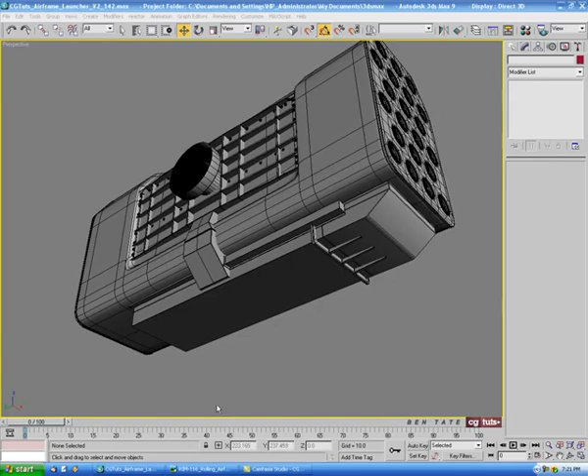Okay, let's do some of this bottom detail here. I think we actually want to have the bottom of this extruded out a little bit farther here. You can see that the bracket piece we just made is actually sitting against a little bit of a lip here, and then the doors are on the bottom of that.

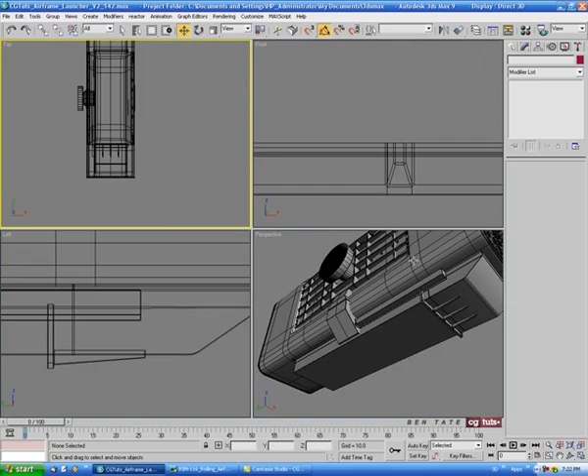We could just pull this polygon out to get a little bit of a recess there, but because we've already chamfered down the edges on the main piece of the base, that's going to give us a little bit of a problem. So just for the sake of speed, I think I'll just put another small box on the bottom of this. Let's select this piece and this piece, and then we'll hide unselected.

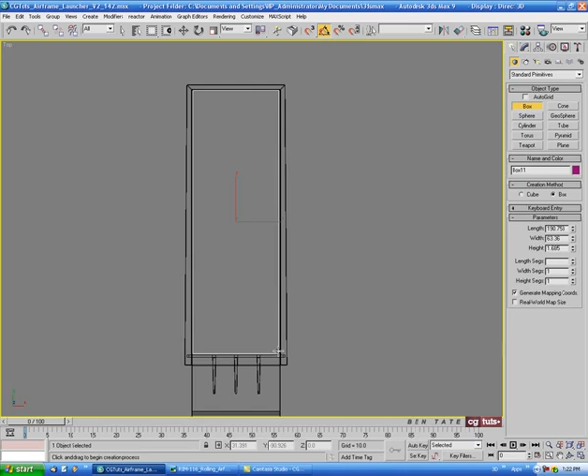Then we'll go into the top view, go back into the create panel, and grab another box. We'll do this a slight bit smaller than the bottom, give it a little bit of height, and center it on X and Y, then move it down in the front view and set it on the bottom here.

Just like that. We'll also move it down in the left view to the back, lining it up just behind the band that we made. Let's figure out the width of this.

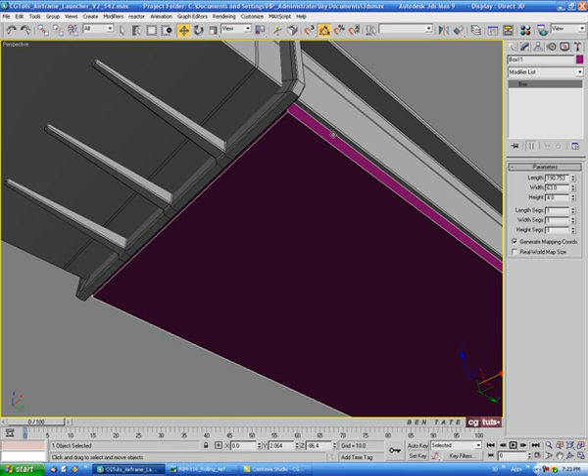Let's do 190.7 on the length, 63 on the width, and maybe 4 on the height. We'll leave it a little bit in from the sides so that we have another reveal there, just to make it look a little bit more detailed. So let's right click and convert this to editable poly.

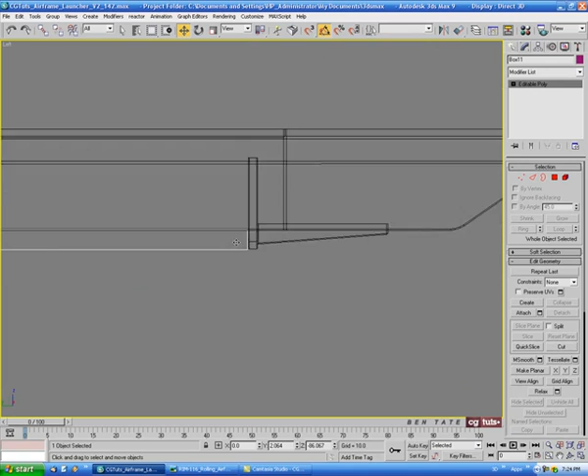Let's move this up a little bit just to make sure it's touching the bottom. I think that should be fine. We really don't need to add any detail to this piece, we'll just round the corners off a little bit.

So let's convert to editable poly. We're going to edge. Let's actually delete the top polygon here first, select the top polygon and delete that. Then we'll go into edge and hit Control A. Let's deselect the top ones - there's really no reason to chamfer those.

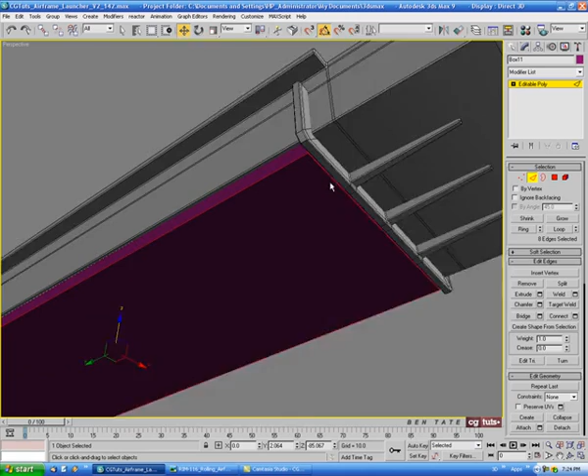So let's just select the edges in the left view, the bottom and the sides, and leave the top unselected. Then we'll just chamfer these ones down just a little bit, maybe 0.25.

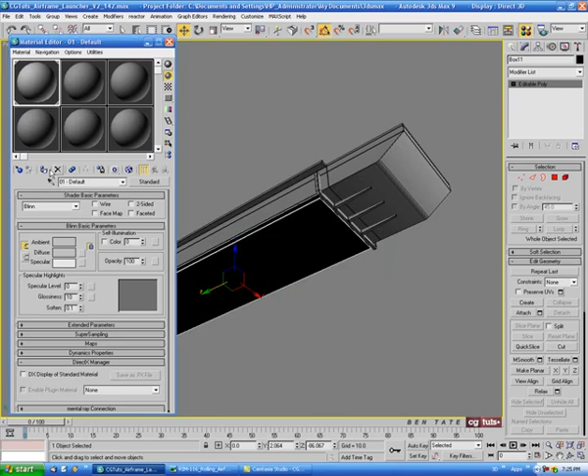Let's just throw the black color on there and see how this looks. That'll give us a little bit of an extra edge on the sides, which will make it look a little bit more detailed. I think that's good.

Now we can just put these doors on. They're pretty simple too, pretty much just boxes. I'm not going to cut the holes in over here, just for the sake of time. I'm going to leave those off, as well as the one around the piece that goes into this side piece. So let's start working on the doors.

For the doors, we could do this out of boxes, but you can see that we have a couple of holes cut into them for handle holds, and there's also a cutout around this piece sticking out here and here. So I think the best way for us to do that will probably be splines, because it's going to be a little bit faster than trying to cut the holes in with edit poly.

So let's select the main base piece here and hide that. Now we've got this piece left. We'll go into the top view. You can see we have a kind of a small door here, a larger one here, and another one at the back. Let's zoom in on this in the top view, I'm just going to zoom into the end here.

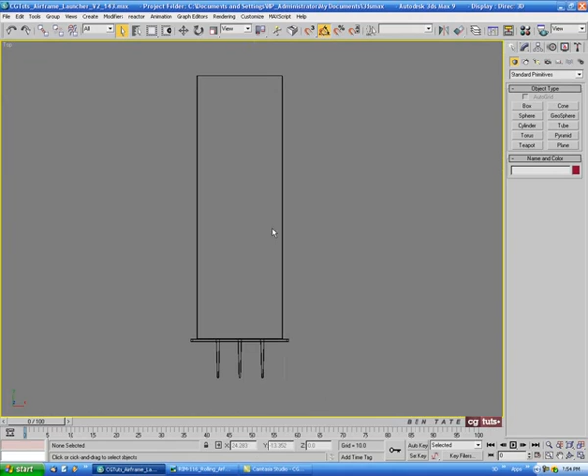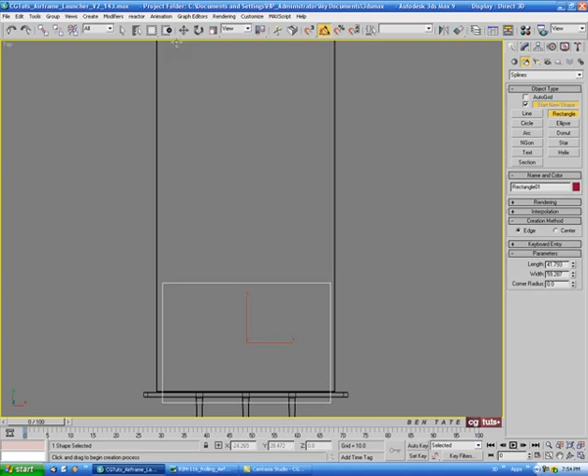We'll go into shapes and grab a rectangle. I'm going to make this a little bit narrower than our box here on the bottom. We'll just drag this out for a second and figure out the size. We'll also go up to the move tool and zero out the X spinner, so it's centered.

Let's do maybe 45 on the length, and maybe 61 on the width. So just like that, we'll just put it right there.

Okay, and for the handhold, let's do another rectangle. We'll just drag that out. You can see it's at the back side here, this cut in and the handhold. So we'll just drag another rectangle out in the center here.

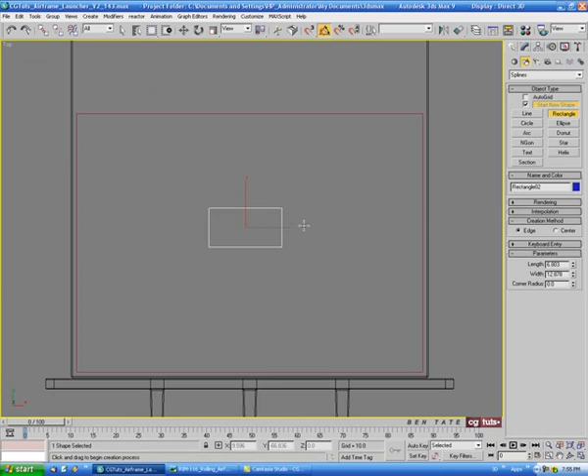And we'll also center that on X. And for the size of this one, let's do maybe 6. And for the width, let's do maybe 13. Okay, and just let me change the color of these.

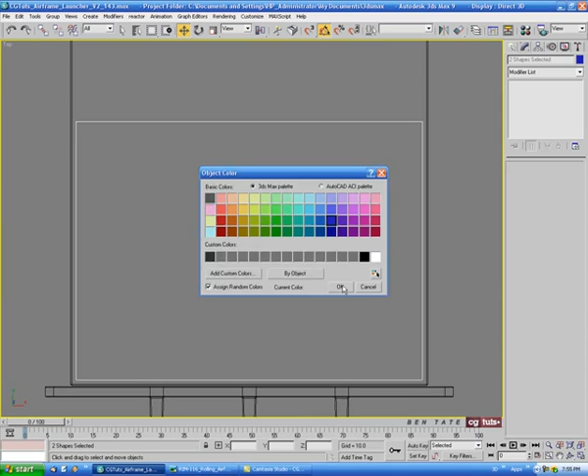Okay, so just like that. And let's select the outer rectangle here. We'll convert it to editable spline. Okay, and let's go into vertex. We'll select all the corner verts, all 4 of them.

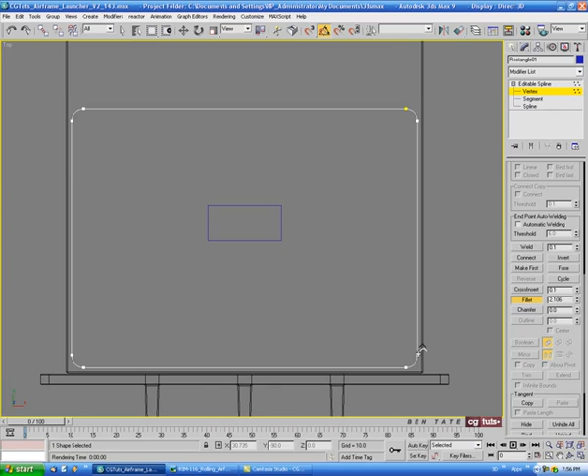Let's scroll down here to fillet, and we'll just give these a bit of a round over. I'm just going to hold the button down and drag up. Let's do maybe about a 2.1 or so on the fillet.

We'll go to vertex, and let's select the middle one here. And let's also convert that to an editable spline. We'll do the same thing here, go into vertex, select the vertices, and we'll fillet these over. We want this to be a little bit more round, let's do about 2.5 for the fillet on that one.

And okay, we'll go to vertex. Alright, and you can see that the hole at the back here is pretty much just half of the shape of that. So let's just hold down shift, we'll drag and copy this up to the edge. Choose copy and okay. Let's just zoom in here.

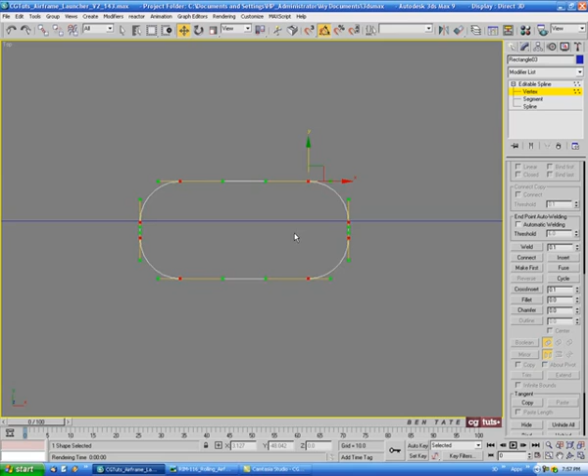I'm just going to go into vertex. Let's select all the verts on this piece. We'll just move this up a bit, so this vertex here is lined up with the edge pretty much. Just like that. Okay, then we'll turn that off. See if this looks about right.

I think we might be able to scale the handhold down just a little bit. So I'm just going to scale it down slightly.

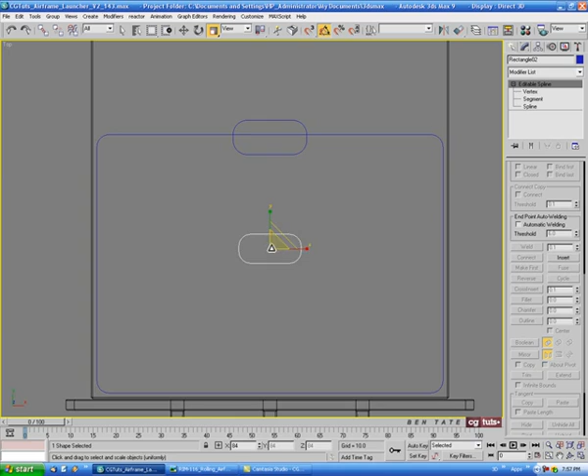And then we'll go back up here. Let's select the circle piece here. We'll go into segment, and let's select the top 3 segments, and we'll just delete those. Okay, get out of segment.

Then we'll select the outside rectangle here, and we'll go into vertex, and we'll go down to refine. We'll just add a vert right here at the edge, and one over here. Just like that. We can turn off refine, and we'll go into segment.

Whoops, just select that middle segment there. We can just delete that, okay, just to cut that out. Okay, so let's turn off segment.

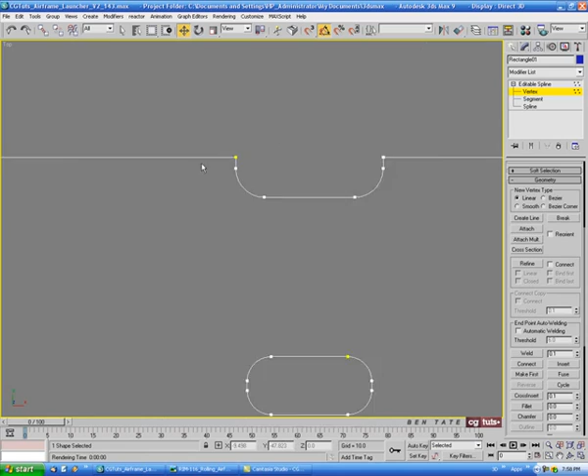We'll go down to attach, and we'll just attach all 3 of these together. Okay, then we'll go back into vertex, and we'll just weld these 2 corners here. So we'll select the 2 verts here. We'll go down to weld and just up this a bit, and it will hit weld, and we'll do the same for these 2 here, and weld, and okay.

Alright, so I think that's good for the first door, and we'll move on to the second one here. Okay, and it looks like we have the cutout on this piece as well, and probably also at that end.

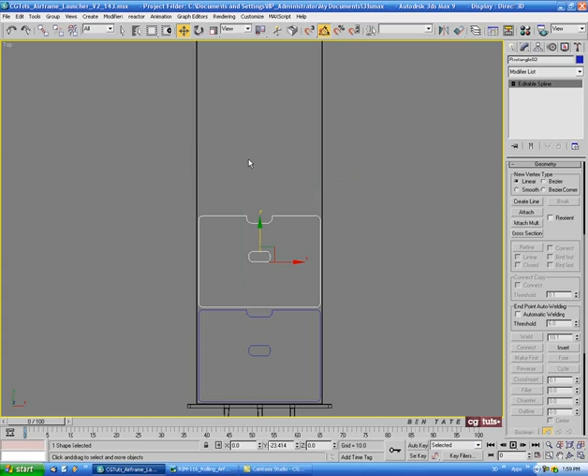So let's drag a copy on the X or the Y up, holding shift. We'll just choose copy and okay. Let's go up to rotate and make sure you have your angle snaps on. Just rotate this 90 degrees, okay, just like that.

Okay, and we'll just push this down, leave a little bit of a gap between the two. Okay, something like that.

And let's also do another shift drag. Okay, up like that. We'll do another copy and okay. Let's just rotate this around again, 180 degrees. Okay.

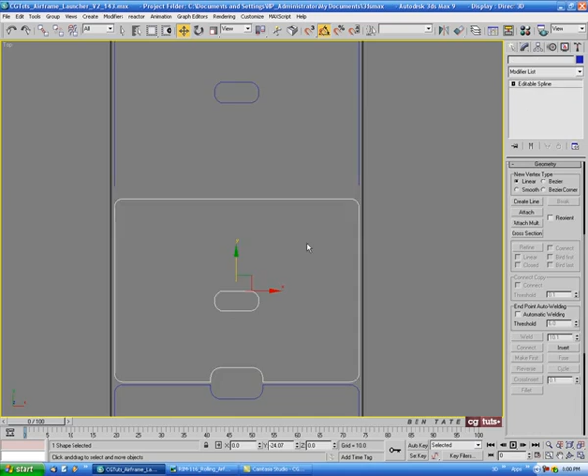And let's see, let's go into segment on this one. Okay, we'll just select the bottom 3 segments here and delete those. And we'll select the second door here, and we'll do the same thing on this one. Delete the top 3 segments and okay.

And then we'll just move this one down so that the edges line up. Okay, like that.

And now we'll attach them together, so we'll go to attach and just click on this one. Turn that off, then we'll just go to vertex and just weld these 2 verts here and the 2 on this side. Okay, so it's all one piece.

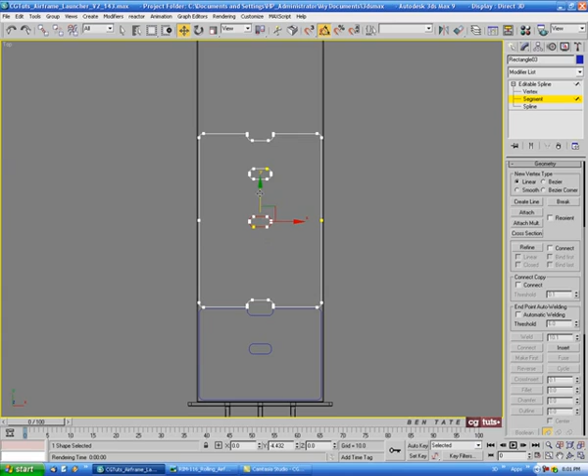Okay, and you can see on here that the holes are a little bit farther down to the end. Alright, so let's just move this guy down a bit. So let's go to segment. Let's grab all the segments on this hole and let's just slide it up a bit. Okay, we'll just bring it up about halfway maybe, like that. And okay.

And for the end one, let's drag another copy of this one down. Okay, choose copy and okay. And we'll just leave a little bit of gap between these two as well. Okay, let's go into segment again. Let's select the center segments around the 2 holes and we'll just delete those.

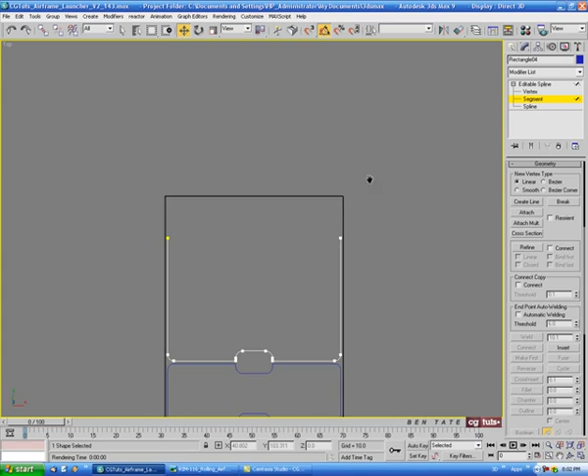You can see here that there really isn't any on this piece. Okay, so delete those. Let's also grab these segments here, everything from the halfway point up, and we'll delete those. Then we'll turn off segment and we'll go into shapes again. Let's grab a line. And I'm just going to put my snaps on for a minute and just make sure you have vertex checked when you right click on that. Okay, and then we're just going to drag a line from this vert to this one and then right click the end. Okay.

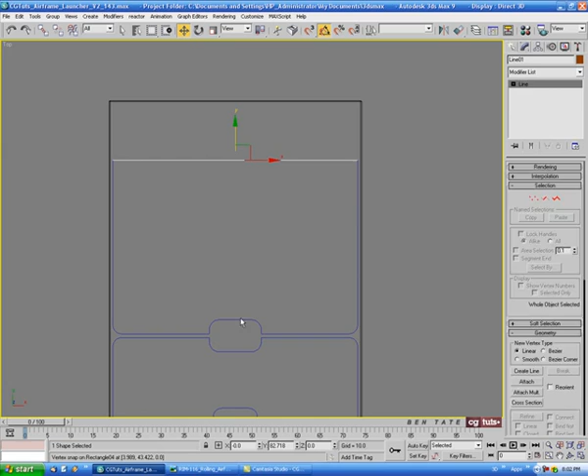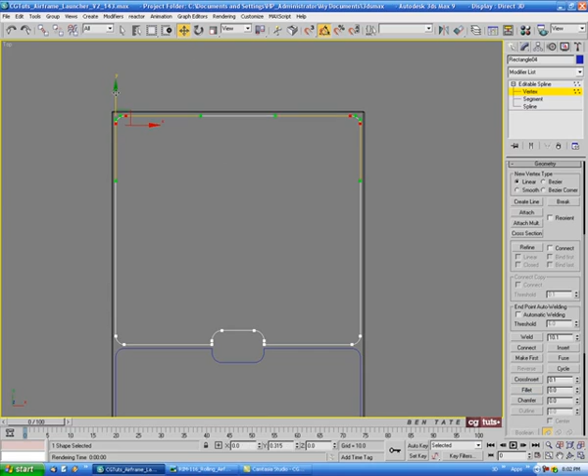Let's turn off snaps first. We'll select our door here and then we'll just attach it to the new line. Okay, and then we'll go back into vertex and weld the corners. Okay, and then we'll just select these guys and we'll just push them up to the end. And then we'll go to fillet and we'll just round the corners over again. Okay, just like that. We could probably do these a little bit closer to the end. Okay, so just like that.

Okay, so let's just drag through and select all 3 of the doors. Okay, and in left view, let's just pull these down to the bottom here. Alright, and we'll just select the first one here, and let's put a shell on this. Okay, so down to shell. Okay, and we don't need this to be really thick. Let's do maybe 2 on the outer amount. Let's do 1.5 maybe. Okay, and let's just copy the modifier here.

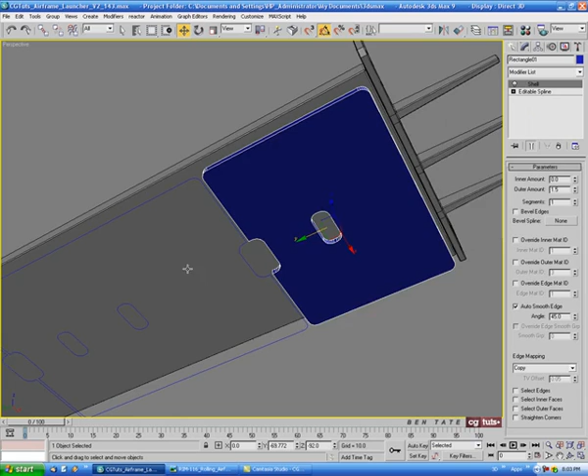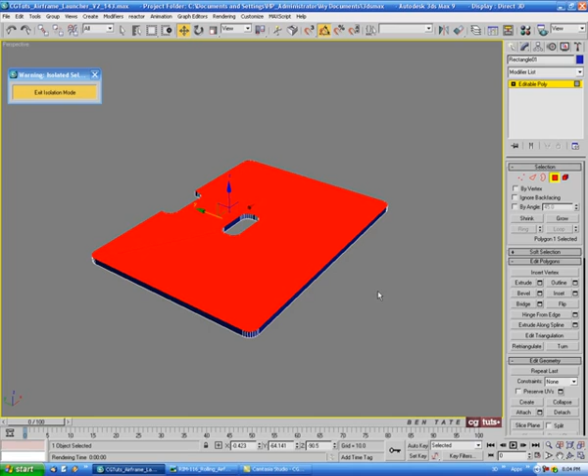Okay, and I'm just going to select the next door down, and we'll just right click and paste that in there, and we'll do the same for the third one. Okay, just to shell all 3 of them. Right, and then we'll come up to the first one again. Let's right click and convert this to editable poly. Okay, and let's go into isolation mode with Alt Q. Okay, then we'll go into polygon, go around to the other side here, select the top poly, and just delete that because we'll never see that one.

Okay, and then we'll go into edge, and let's just go into the front view here. We'll select all the edges. Okay, then we'll hold Alt and just deselect the top and sides. Okay, so the only thing we have selected is the bottom border. Okay, and we'll also deselect this edge here. Alright, and make sure you have ignore back facing turned off. Okay, so we'll just give this a little bit of a chamfer. Let's take this down. Okay, we'll take that down. Let's do maybe 0.3 and okay. Okay, just to round it off a little bit.

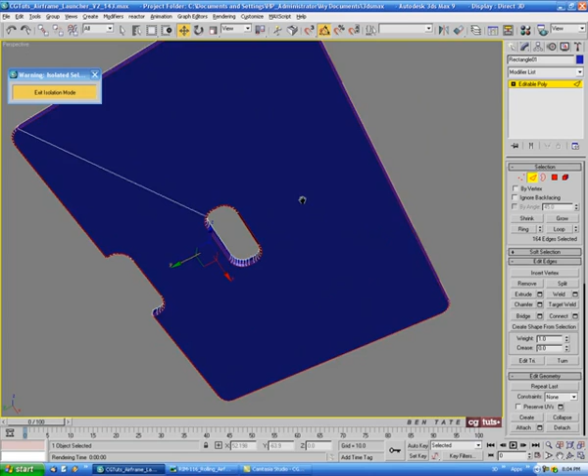Okay, we'll just check to see if that renders properly. Okay, occasionally we'll get an artifact around the edge, but that looks pretty good. Okay, so let's turn that off and we'll exit isolation mode. And we'll repeat the process on the other 2 doors here. Okay, so let's convert this one to editable poly. Go into isolation mode. Delete the top polygon.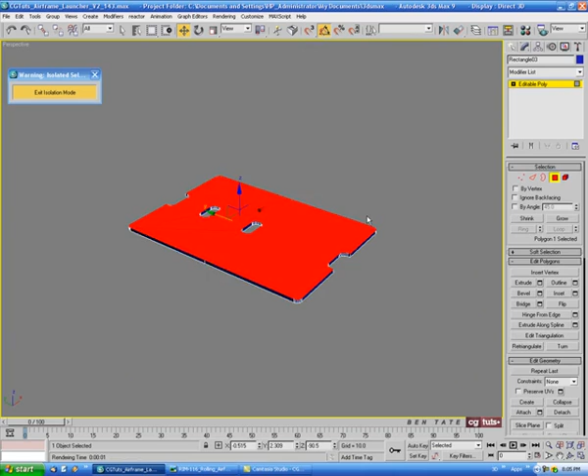Go into edge. Grab all the edges. Deselect the top and sides. Okay, and then we'll also deselect these two. And then we'll do a chamfer and 0.3. And OK. And then we'll just check this one. That looks good. So we'll exit that and do the same thing on the last door here.

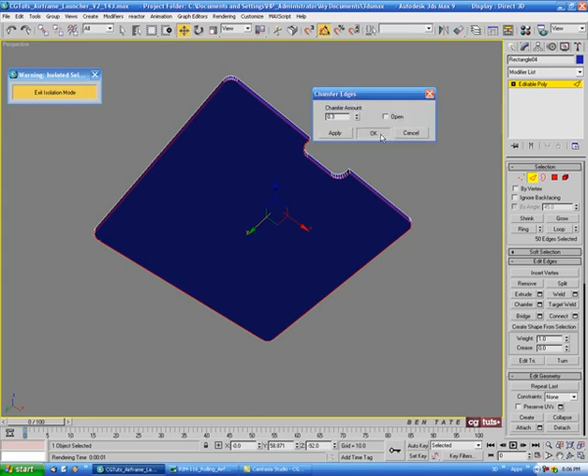Convert to editable poly. Isolation mode. Delete that polygon. And just grab all the edges and deselect the top and sides. Okay. Then we'll chamfer that down the same amount, 0.3. And OK. And we'll check it. Okay, looks good. So we can exit isolation mode. Let's just select all three doors, and in the left view here, let's just move them up and put them against the base. Alright, just like that. Alright.

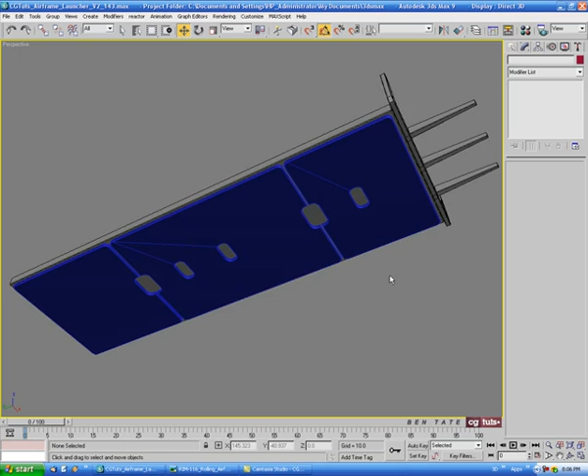Okay, and you can see here that the handholds just punch right through to the inside, so it's really just showing this piece of the box up above it. And if you wanted to fix that and actually have some geometry in the hole, let's just select this. We'll go back into isolation mode with Alt Q. Okay, then we'll go to border. We'll just select the border on the inside of the hole, okay, the top one. Okay, and then we can just hit cap.

Okay, and then we'll hold control and click on edge. So we have the top edges selected there. Alright. And if we go into the front view here, we can just move these down, right, to shorten that hole up if you don't want it to be as deep as the entire door. Okay. So we just pull it down like halfway or something.

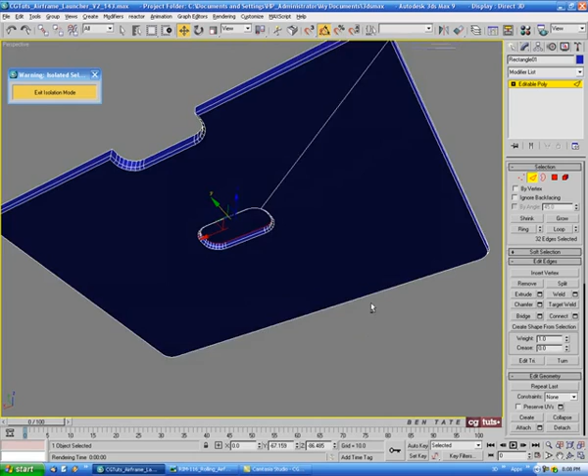Okay, so just like that, that'll make it look a little bit finished. And let's actually just do that on the other doors while we're at it. Okay, so we'll do that to the second one. Select that. Let's go into isolation mode. Okay, we'll just select both top borders here of the holes. Okay, and we'll do a cap, and then control click edge.

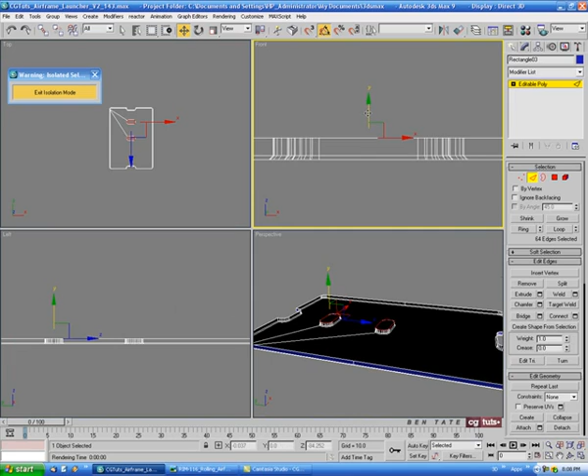Alright, we'll just move these down a bit too, just so they're not as deep. Okay, and I think that looks a little bit better. Alright, so we'll test render again. Yeah, and that looks good enough, especially at a distance. Okay, so I think we'll just go with that for the doors. So let's exit isolation mode.

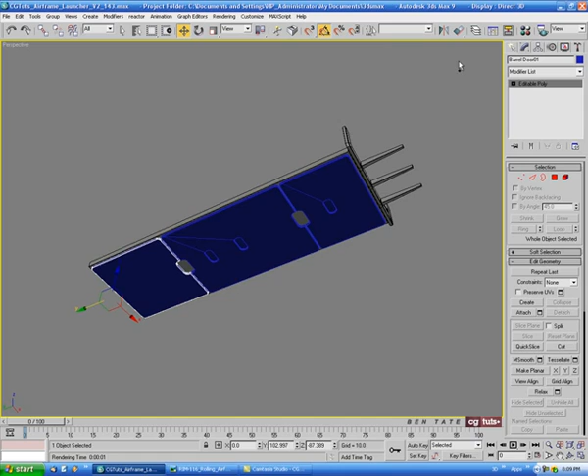And let's just name these. Let's call this barrel door, and we'll just do a 1. Okay, and I'll just copy the name off of that, and we'll just paste it onto the other ones. Let's do 2 and 3. Okay, we'll change the color of all three of them, and we'll put our gray shader on there. Okay, just like that.

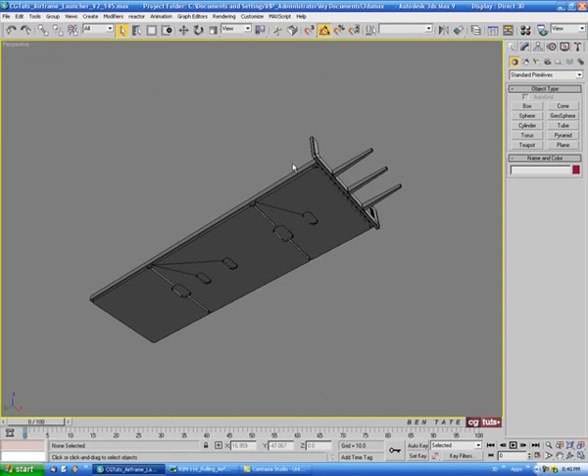Okay, so I think we should probably start getting some of these hinges in here, and it's kind of hard to see what these look like, but I think we'll just do a simple version, a little more simplified than these. Okay, so let's go in here and let's unhide our base piece. So I'm going to go into the display tab and we'll go unhide by name. Okay, and we'll just select the barrel base. I think that's what it was called, and unhide. Okay. Right, and let's just start this with maybe a box. Alright, so

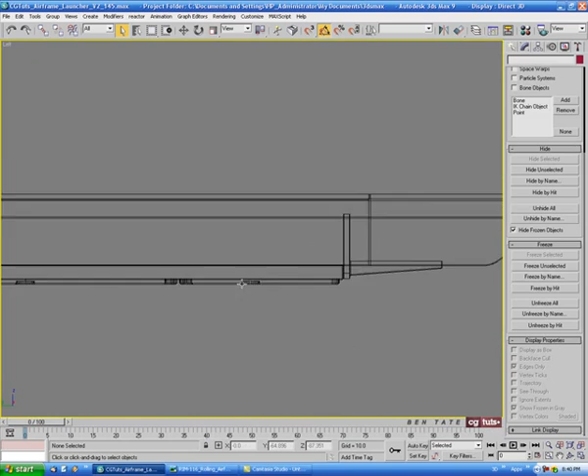let's go into the left view. We'll zoom in on the front door here. Okay. Let's grab a box and let's just go from maybe this edge here. Okay, we'll just come down to the bottom. Okay. And we'll give it a little bit of height. Right, and actually let's take this down a little bit more. Let's do maybe 2.5 for the length, and let's do maybe 3 for the width, and maybe 2 or so for the height for now. Okay, and we'll just do one segment each way.

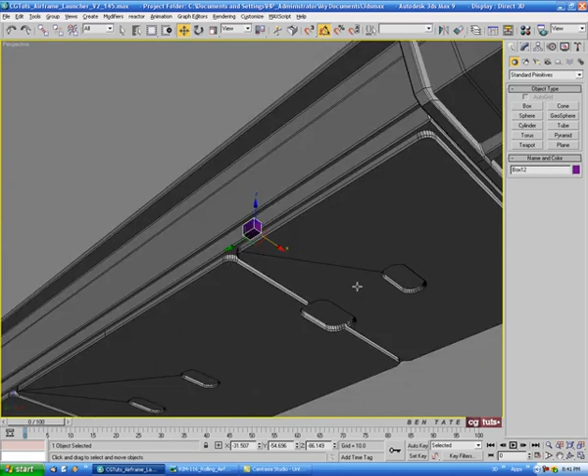Right, let's just move this down and line it up with the bottom edge here. Okay, and then we'll just move it over to the side in the front view. Okay, and let's just put it out on this piece here, just against the side of this piece. And we'll see what that looks like. Okay, I think that should be a decent size. So in the left view, let's convert this to editable poly. Let's go into edge, and grab these edges. Let's do a connect on that with 2 segments. And let's just take this in a little bit on the pinch. Let's do maybe -10 and OK.

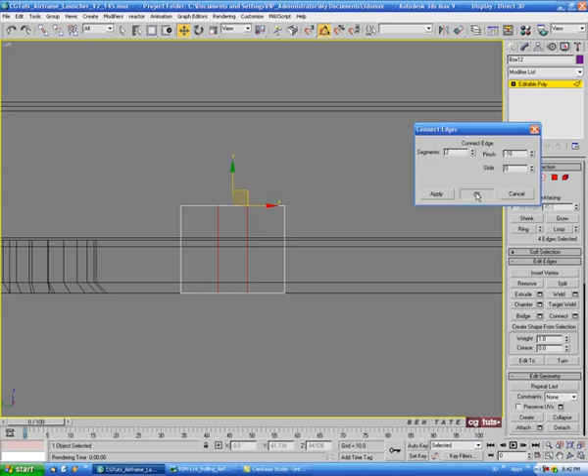Let's go into polygon. Alright, and we'll just select the 2 top polys. Okay, let's extrude those out. And we'll take this way down. Okay, let's do maybe 2.2 and OK. And in the left view here, let's go back to edge and we'll grab the side edges here. Do another connect. We'll do 1 segment, no pinch. Slide that in a bit towards the base. Let's do maybe -50 and OK.

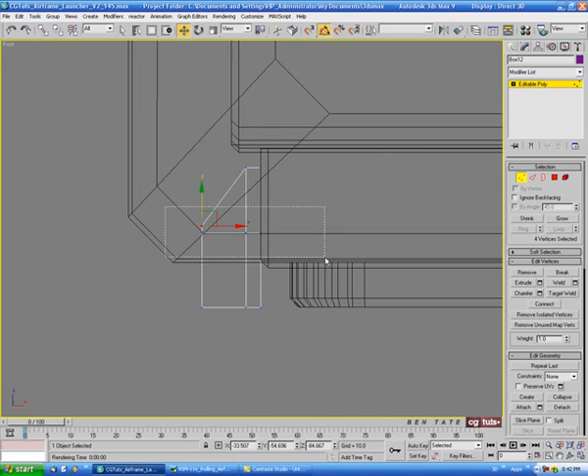And then we'll go into vertex and grab these verts. Let's just angle those a bit. Okay, let's grab all these middle ones actually. Let's pull this down a little bit more. Okay. And this will be a pretty small detail on the whole model, so we don't really have to spend a lot of time getting it perfect. Alright, so let's just do something like that. Let's go into edge and we'll do Control A.

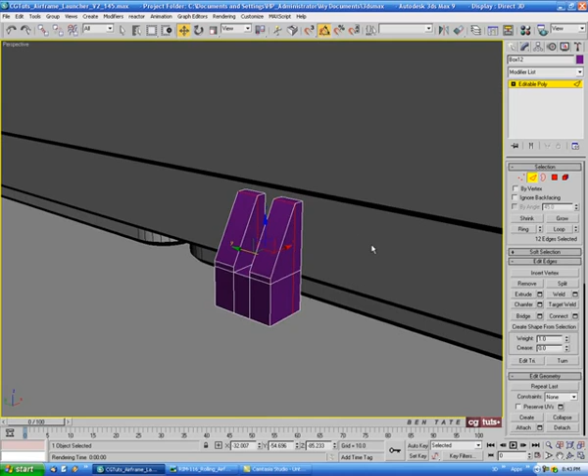Okay, let's just go into the side view here. We'll just deselect a few of these edges. Let's deselect these ones here. And let's turn off ignore back facing. Okay, we'll just deselect these side ones and these ones here. Okay, we just want to pretty much do the outline. Okay, maybe just like that.

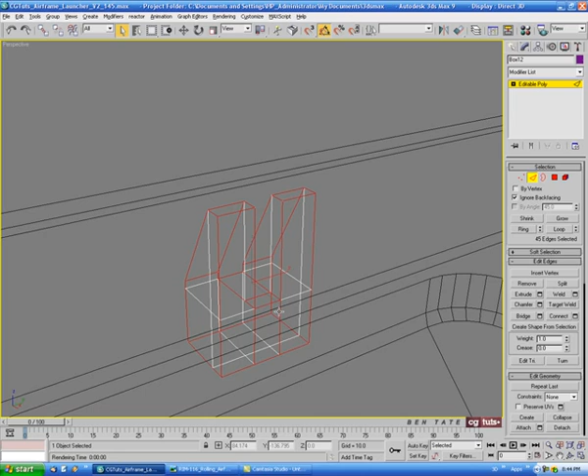And I'm going to go into wireframe for a second and just check out the inside. Okay, we'll deselect these 2 and these 2. Okay, so pretty much just the outlines. Right, and let's just chamfer that down. Okay, let's do that maybe, let's do 0.08 and OK.

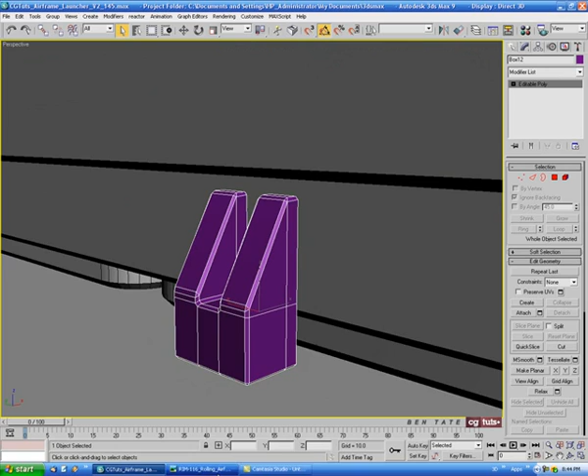And let's put a little plate in behind it. So let's grab another box. Okay, we'll just drag that out, maybe something like that. Give it a little bit of height. Right, and just try to make sure it's centered on the pieces here. So let's do maybe 3x4. Maybe 3x4.2. Okay, just so it sticks out a little bit. And let's give it a little bit more height maybe. Let's do 3.2.

And we'll just move this over in the front view to the edge. Let's just push it against the edge there. And I think we can thin it up a little bit. Let's take this down. Let's do maybe 0.15 or so for the thickness on that. Okay. And let's also convert that to editable poly. And let's go into polygon. We'll select all the polys. Then we'll just hold Alt and deselect the front and side, so we just have the back face. Select it. Okay, we'll delete that.

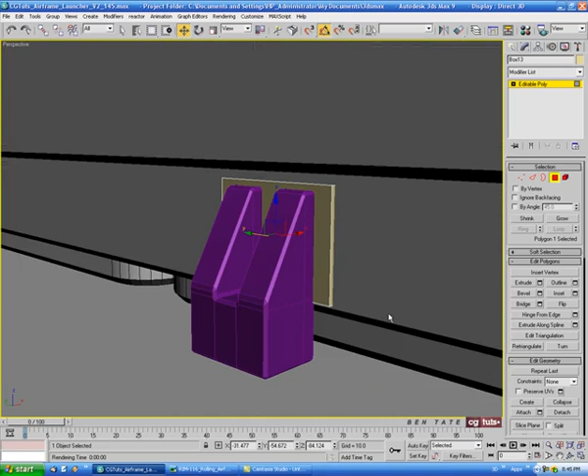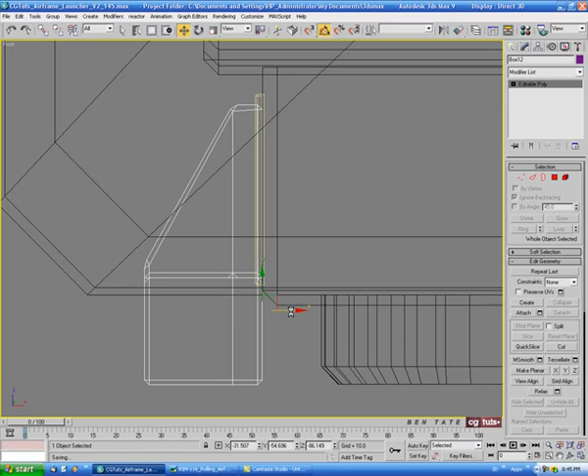Then we'll go into edge and we'll just do Control A. And we'll just give this a slight chamfer as well. It doesn't have to be a lot. Let's do maybe 0.03 and OK. And I'm just going to select the main piece of the hinge here and just move it out a little bit more. Okay. Just out like that maybe. Just so it's sitting against the surface. Let's move it in a little bit. Maybe like that.

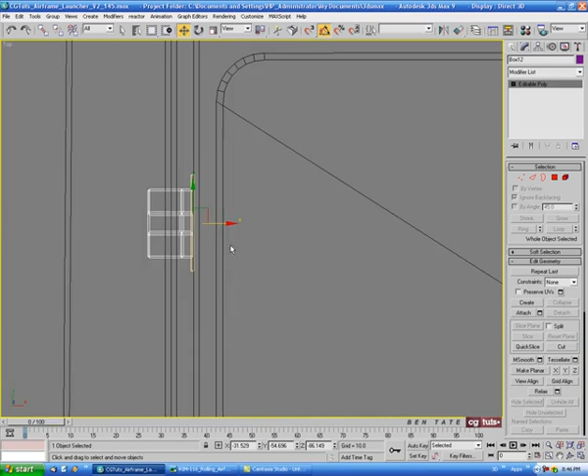And let's see. The bottom's pretty simple. Let's just do that out of a spline. Okay, so go back into the top view. We'll zoom in here. And then we'll go into the shapes. And let's grab another rectangle. Right. Let's just start there maybe, and we'll just bring this over like that. Alright. Let's try to center it to the hinge. Let's see. Let's do maybe 2.3, and we'll do maybe 6 on the width. Right, and we'll convert that to editable spline, and we'll drop this down into vertex. Let's select all 4 vertices, and then we'll go over here to fillet, and we'll just round it over a bit again. Let's do that maybe 0.5 or so on the fillet.

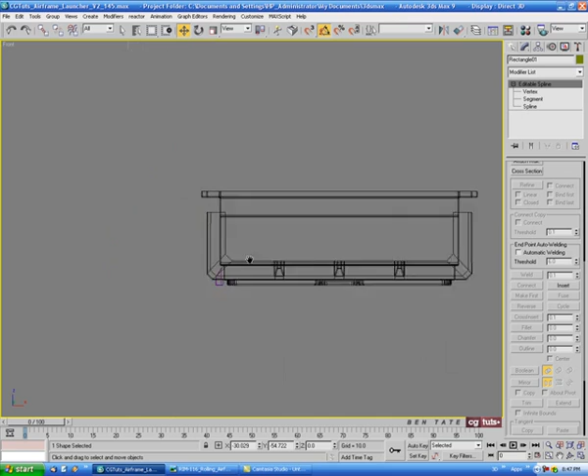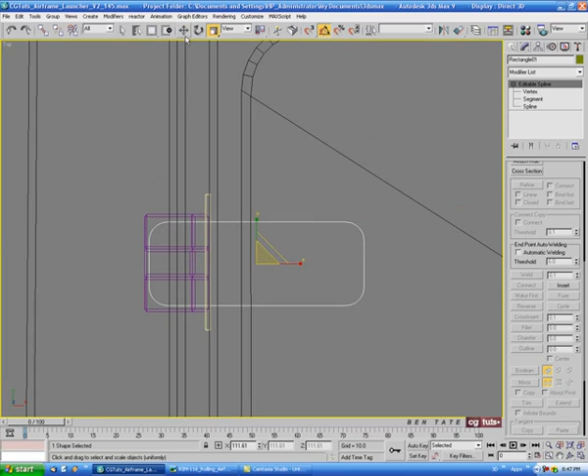Right? And then we'll move this down in the front view. Okay. Let's just put it there for a second. A little bit more down. Okay. And we'll see if that looks like about the right size. Could maybe go a little bit bigger, so let's just scale it up. Maybe like that. Right, and let's put a shell on here. Okay, and let's take this down quite a bit. Let's just do maybe 0.25 on the outer amount.

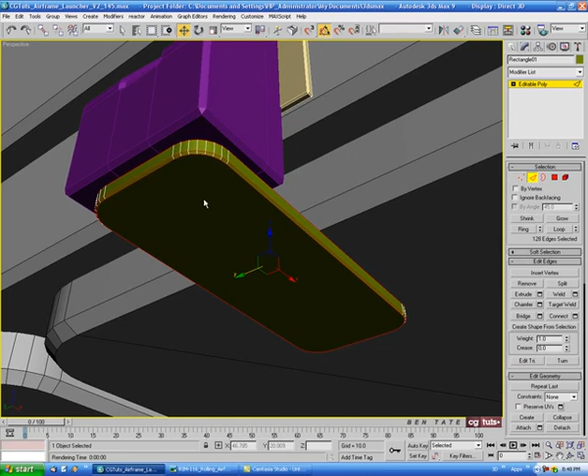Okay, and then we'll right click and convert that to editable poly. And then we'll go into edge, and let's just do Control A, and then we'll drag through the center edges in the front view, okay, just so we have both borders around the top and bottom selected. Let's just chamfer this over a bit. Let's do maybe about 0.3 or so, and okay. And I'm not going to bother cutting any holes through this for bolts or anything. I don't really think we have time to do that. This tutorial's already getting pretty long, so I'm trying to just get as much detail in as I can before I run out of time.

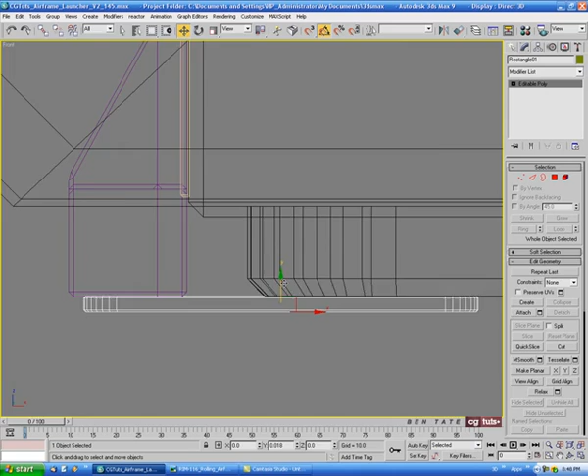Okay, so I think that's pretty good for the hinge. It probably wouldn't function, obviously, but that's okay. We're never going to have to open these doors anyways. Alright, so let's do something like that. And let's go back into the display tab, and we'll just close that up. Let's go to unhide by name, and let's just find a bolt. Alright, let's do just one of our bolts here. We'll just do bolt 79, and I'm not sure exactly where that is. Looks like it's over here. Okay, and that's one of the ones from the grill. Okay, so we'll just use that for the bottom of this.

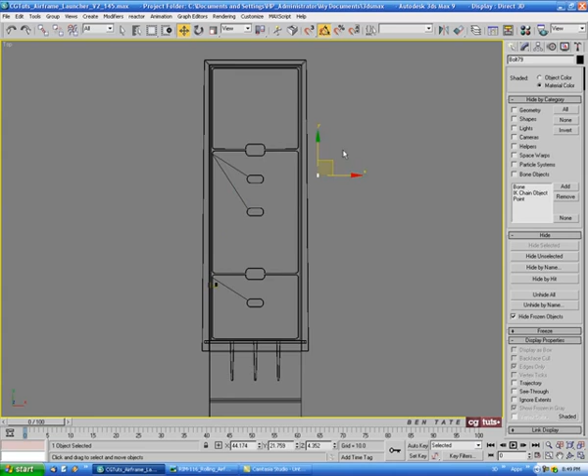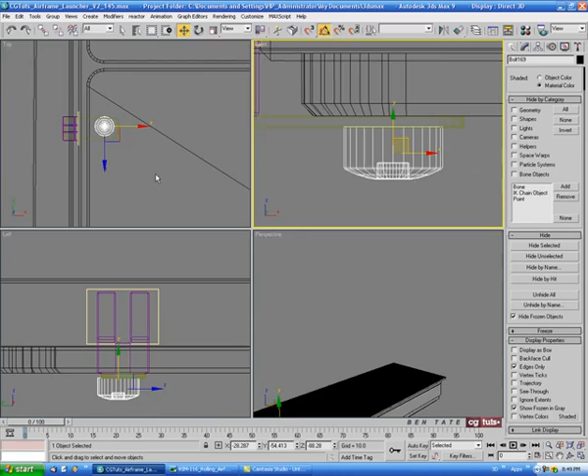So in the top view, I'm just going to hold shift and drag a copy over to our hinge. We'll choose copy and OK, and then we'll select the bolt 79 there, and we'll just right click and hide selected so we don't move that. Okay, so let's just move this down into position. Okay, and let's rotate it 90 degrees. And it's obviously way too big, so let's just get it in here and then we'll scale it down. Okay, and let me just change the color of these other pieces here. Okay, so I'm just going to put the black color on there and the gray shader.

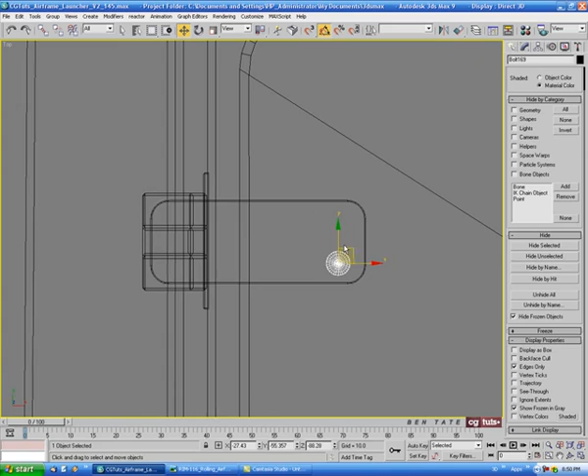Okay, then we'll just select our bolt here and we'll just scale that down a bit in the top view. Okay, let's take it down pretty small. Let's do something like that maybe. And let's put one here at the end. Okay, and then we'll just hold shift and do a copy. Like that, and let's do one more over here.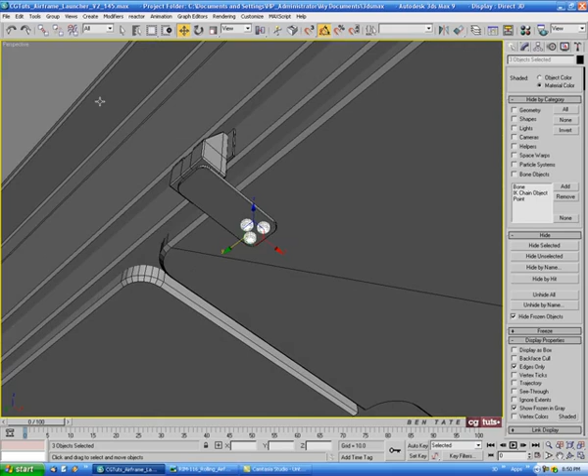Okay, and then in the front view here, we'll just move them up and set them against that plate. Okay, just like that. And I know that's pretty quick, but it should be fine. Okay, I'm actually going to just scale them a little bit on the Y just to shrink them up. Okay, just down a little bit like that, and then we'll just push them in. Okay.

And we have kind of a cylinder extrusion coming out at the ends here. It's a little hard to see. Let's just do something there quick. Okay, so in the top view, let's go over to the end here. And let's grab a cylinder. Okay, let's just draw that out. Give it a little bit of height. We'll just try to center it on our hinge. Okay, maybe something like that. Let's move it down.

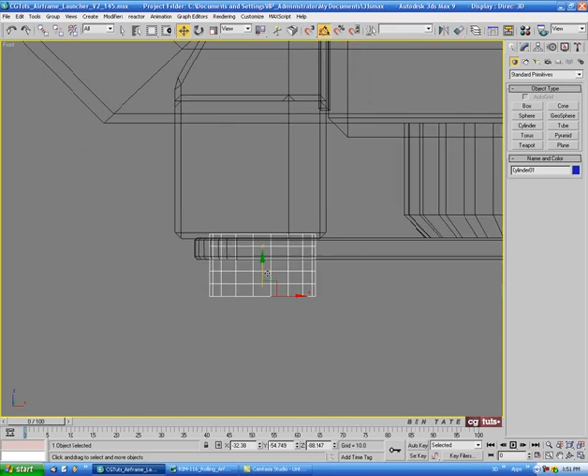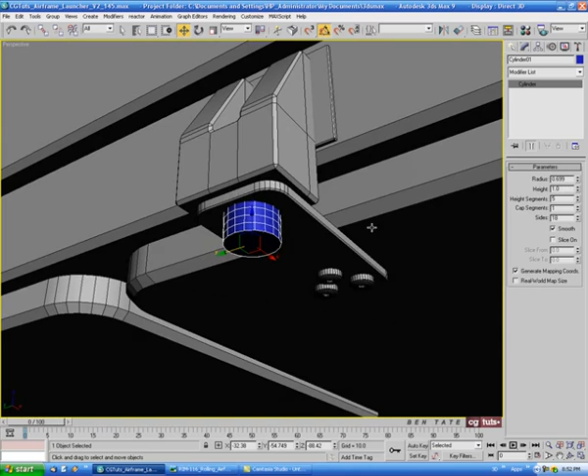Okay, and let's go into the modify panel here. We'll do 0.7 for the radius. Whoops. Okay, and let's do maybe 1 or so for the height. Okay, and we'll take the height segments off. Let's give this a few more sides. Let's do maybe 24. And we'll give it a cap segment as well.

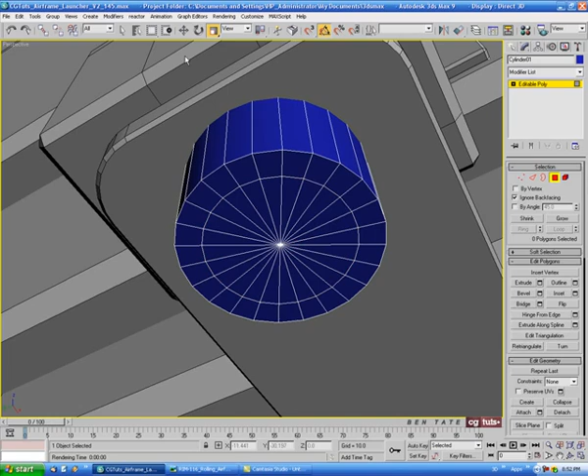Let's just go in here. We'll convert this down to a poly. Let's go into edge. We'll select an edge on that loop there. And we'll do a loop around that center one. Okay. And then we'll just scale this out a little bit. And let's go into polygon. And I'm going to turn on ignore back facing. Okay, we'll just select the middle polygons here. Right. Let's extrude that out a bit. Let's do maybe 0.3. And okay.

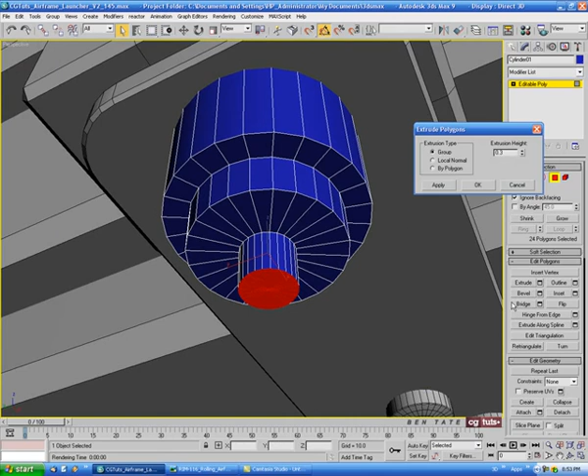And let's go back into edge here. Let's grab these middle edges and do another connect. Okay, I'm just going to take this down a little bit on the slide. Let's do about 30 and okay. And then we'll go back into polygon and we'll just hit shrink once. Okay, so we got the center one selected. Let's extrude this out a little bit more. Let's do maybe 0.6.

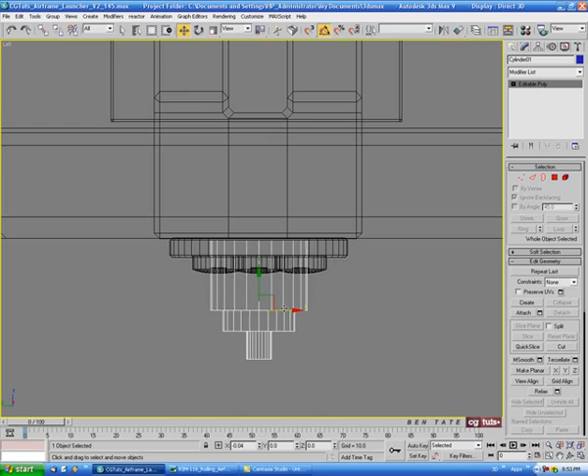Okay, and I think that's somewhat what this looks like. Let's maybe take this down a little bit. Let's do 0.4 and okay. Right, and we'll just line it up here a little bit better. Let's just push it over to the left a little bit. Okay, and we'll just quickly chamfer down some of these edges. So let's do that one and this one. Let's chamfer those down. Okay, we'll just do that a bit. Let's do 0.03 and okay.

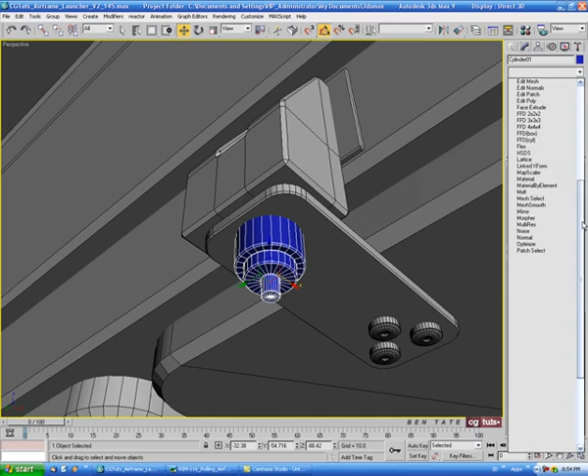Let's grab this one and this one here, as well as the bottom one, and we'll just do a loop on those. Okay, and I'll take that down to maybe 0.01 and okay. Right, and in the front view here, I'm just going to turn off ignore back facing. Grab these verts. I'm just going to move them down a bit. Okay. And let's throw a smooth on there. Okay, and let's do auto smooth again, and we'll change the color. Let's put the gray shader on there.

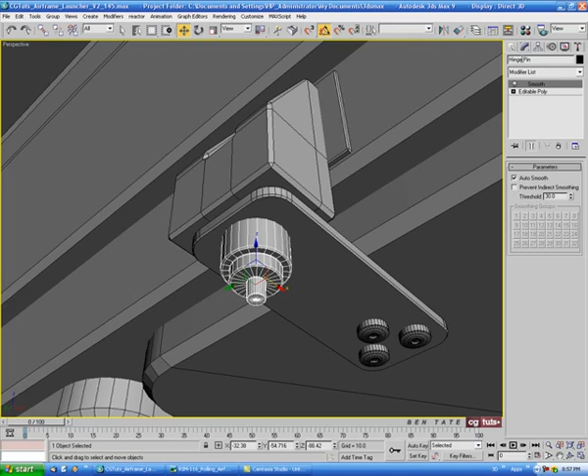Okay, and let's just name some of this stuff. So let's just call this hinge pin. Okay, and I'm just going to copy the hinge off of that. Okay, and let's select the piece here. We'll just name that hinge plate. And this one, let's do hinge main. And the one up here, let's do hinge base. Okay, and then these bolts, let's just put that in there and we'll just call that 01. And we'll do the other two here, if we can select them. There we go. Let's do bolt 02. Okay, just to keep everything organized.

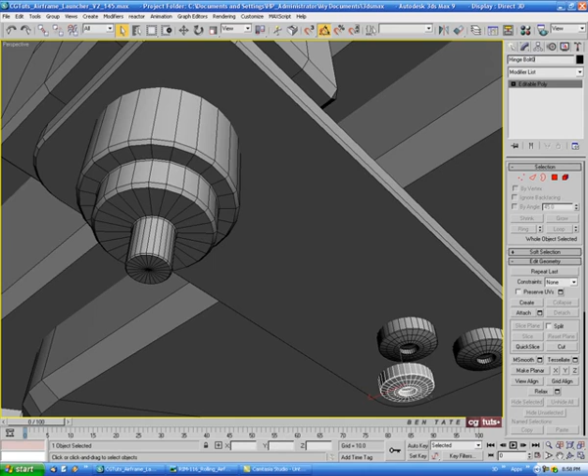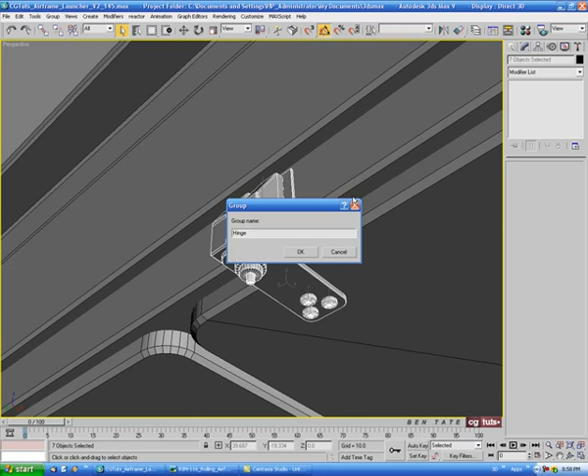Okay. And let's go back into the front view and let's just select the hinge base, the main part, the plate, the cylinder, and the 3 bolts. Okay, just so we have everything selected, and let's just do a group on this. Okay, we'll just name that hinge and okay. And apologies for going fast on that part, but I'm just worried about the time. Okay, so let's make some copies of this one and let's center its pivot point.

Okay, and in the top view here, let's just clone this a few times. Okay, so let's move our copy down here to the end. Okay, and we'll just do it a little bit from the outside corner there. Okay, then let's hold shift and we'll drag a copy on the Y down to the other side. Okay, we'll try to position it about the same distance from the end. Okay, just like that. And then we'll do another one here. Okay, and one down at the other end.

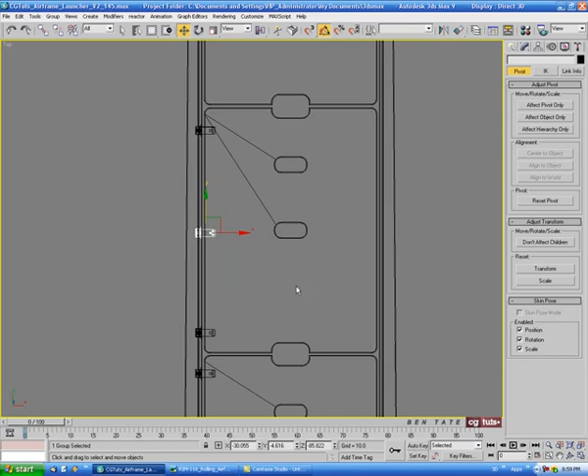Okay, maybe there. And let's also do one in the middle, maybe. And I'm just going to eyeball the distance between them and try to get it even. Okay, maybe like that. And then we'll do a couple on the last door here. Let's put one there, maybe. And last one down here. Okay. We'll see how that looks. Alright. So I think that should be okay for those.